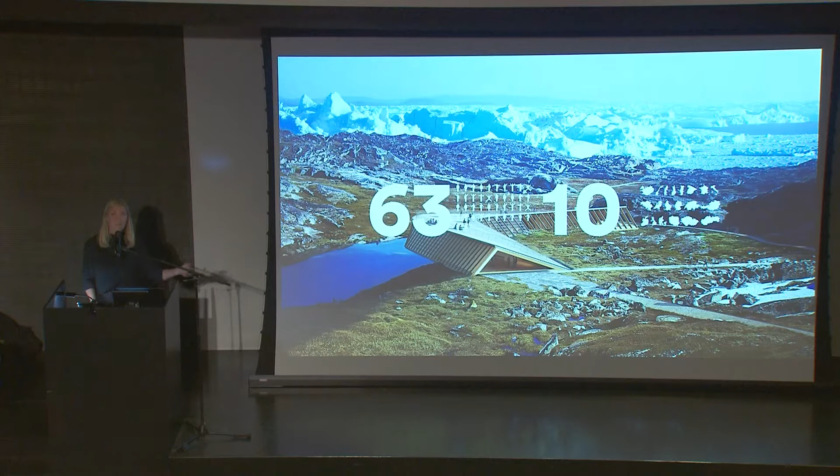We are 63 people in the office for the moment, and we're from 10 different countries, including the United States. We like to have a global atmosphere in the office, even though we think that we do stand on the shoulders of the Scandinavian tradition. What you see here is the Icefjord Center in Ilulissat in Greenland. It's already almost finished, but it takes a long time because it's placed 300 kilometers north of the Arctic Circle, and it's almost impossible to build here during the winter time. So we spent twice as much time to build here.

But sustainability with this project is also about how to ship material to this place, how to pack it into containers, how to assemble it without using too much machinery, and so forth. It's mainly a wood construction also, and it's prefabricated and shipped to Greenland, because there's no woods in Greenland. You can say, is it sustainable or not to ship wood from Denmark to Greenland? But there's a lot of choices that you have to make all through this process, and that's what you need to work your way through.

We think that sustainability also has to do with being in place and in a way also creating place where you are. So it has to do with reading the conditions around the place. It has to do with understanding your own role in comparison with time, you could say. This is the oldest landscape in the world, actually. This is where you discover that the Earth was, I don't know how many million years older. When you look at the rock here, it's bedrock, it's from the inside of the Earth. So being in place and understanding your own role is part of being sustainable, and also part of anchoring the building to the place and making it part of a local life.

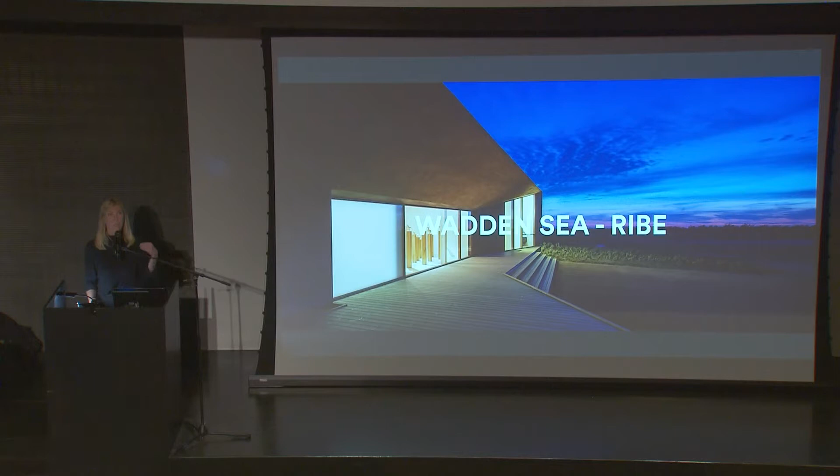The Wadden Sea Center in Ribe is in Denmark, and this is all about materiality and history and landscape at the place. We're using locally harvested straw as a material that clads the whole building, both facades and roof. And somehow it has very much to do with the landscape. It doesn't have to do so much with choosing a certain material, but it has to do with choosing the right material for the right place at the right time.

The third Wadden Sea Center that we're doing right now is in Groningen in Holland, and this has to do with the tide, and it has to do with understanding the horizon and the lives of the seals around, but also it has to do with the industrial harbor and, in a way, giving back public space and direct access to the water.

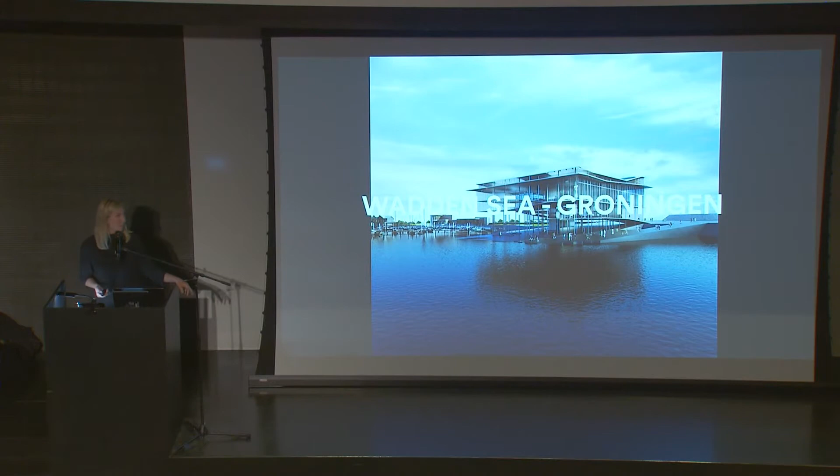The last competition that we've been winning and that we are doing the detailed drawings of right now is the Whale, which is 300 kilometers north of the Arctic Circle in Norway. And this has a totally different materiality because it's a totally different place. It's using local stones as a cladding on the shell of the roof. And it's a center for whales. Also, it has to do, of course, with a very specific place, and it has to do with the reading of the landscape.

So coming to Arkansas. The Anthony Timberlands Center. Arkansas is a whole new place for us. So we've been trying to understand it, and maybe we have a little bit of a romantic reading of the place. But to me, it's a very unique setting. You have, in a way, the feeling and the presence of wildlife and forest right around it. And for a Scandinavian, especially for a Dane, that actually never really meets the real wildlife, this is a very exotic place to us.

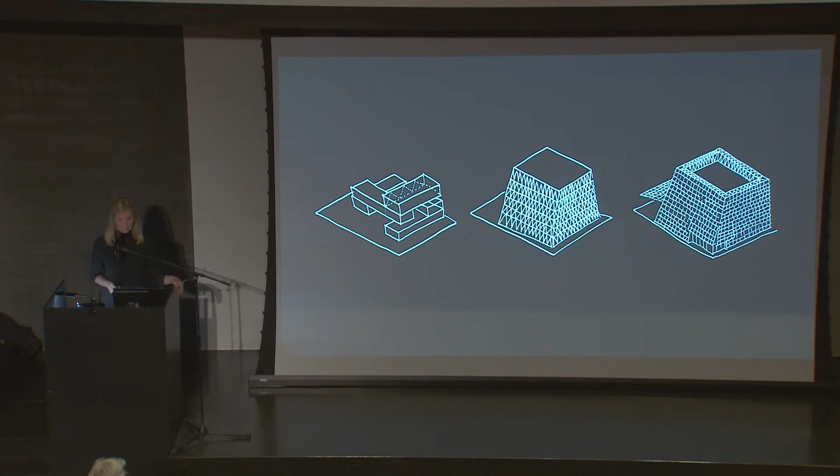At the center of the building, an open atrium extends from the fabrication floor to the roof terrace, like a clearing within a forest. So ascending the open atrium stair, visitors have uninterrupted views to the fabrication shop and to all the activities in the building. So you move up along the stair on the inside of the atrium all the way up. And by doing that, you will have both views to the activities on the floors, but also to the activities in the fabrication shop.

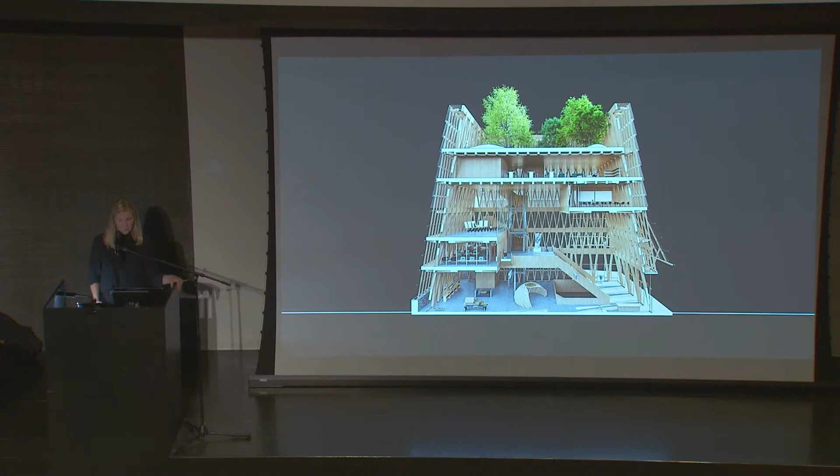It culminates in the rooftop forest that provides a 360-degree view overlooking Fayetteville and the Boston Mountains. The double height spaces create a spatial variation and provide the flexibility and potential for adding intermediate floors within the vessel, and hereby expanding the total area within the building volume. And this is, of course, to do with future expansion.

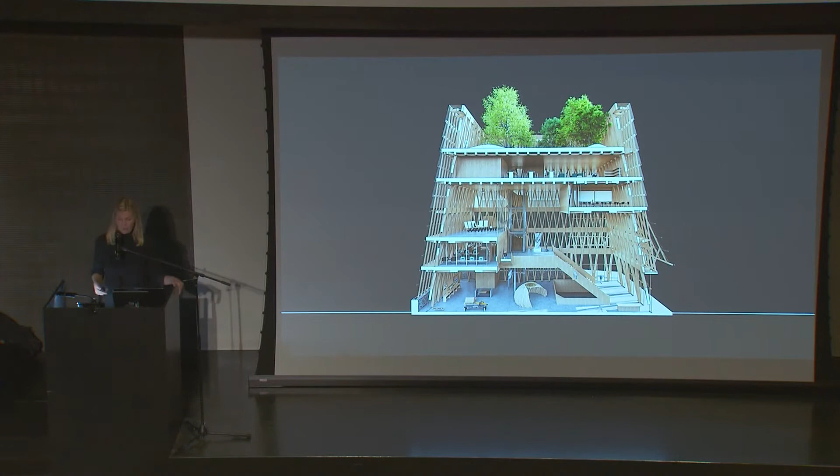So you have the possibility of adding extra floors into the double height spaces here, and by having no columns here, you will also have the possibility of really making very large objects or high objects in the fabrication shop.

The roof terrace here, we actually imagine as an arboretum where you can have Arkansas trees planted here, not only to show the Arkansas trees, but also to provide shadow and the possibility of actually being on the rooftop in the summertime instead of having the sun burn you out.

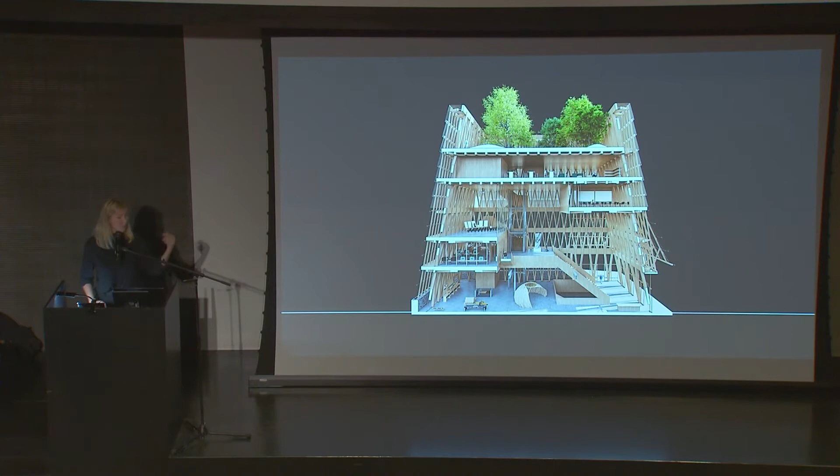The prominent porch motif that you see in the vernacular Arkansas architecture is reimagined as a balcony zone between the facade layers. The pine cone, in a way, is opening up when it's losing its seeds, and we imagine the outer skin of the building to work like a pine cone. So you have an outer layer of single layer glass, very simple, very low tech, almost like a cladding that can open up, or like wood shingles but in glass.

So by having this outer layer, you can in the summertime open it up to get air, but also you can slide the whole outer facade away, so you have a porch situation. And in the winter time, you can slide it back, and you will have an intermediate zone that is preheated by the sun. So the porch actually encircles the building and acts as a social space. So in the summertime, you could also just use it as a balcony space, not smoking, but drinking coffee.

And also we imagine that the whole facade can be used as a tree nursery for small trees. And by doing that, we can actually show off the whole life cycle of the tree. There's also a potential to integrate planters in the flooring, or we can work with a much more minimal balcony construction, and that's all depending on the final usage. The porch and the wood structure is protected from the weather by the shingle glass, but can also be completely opened in the warm season.

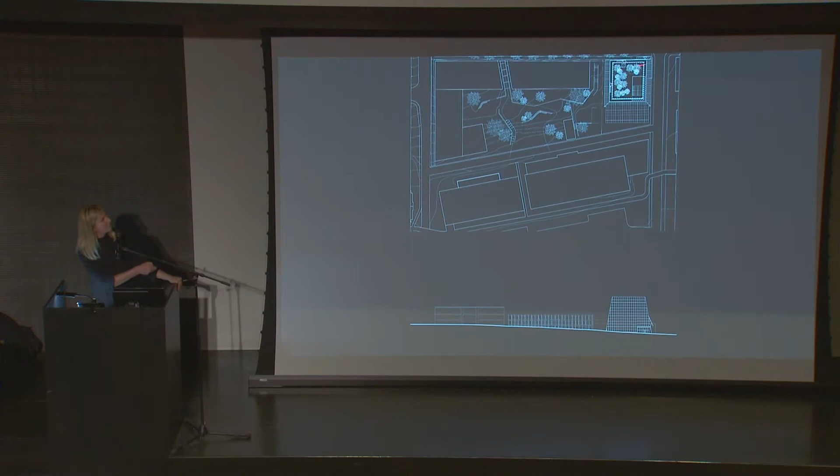The entrance is placed at the corner of Martin Luther King and Government Avenue here, and is directed towards both streets. And then you have the fabrication yard here with the delivery in this end, because we think it's quite important that you don't cut off the connection between the art school and the fabrication shop by lorries and trucks coming, and delivery and so forth. So the delivery is here, and the gantry crane is coming in this direction.

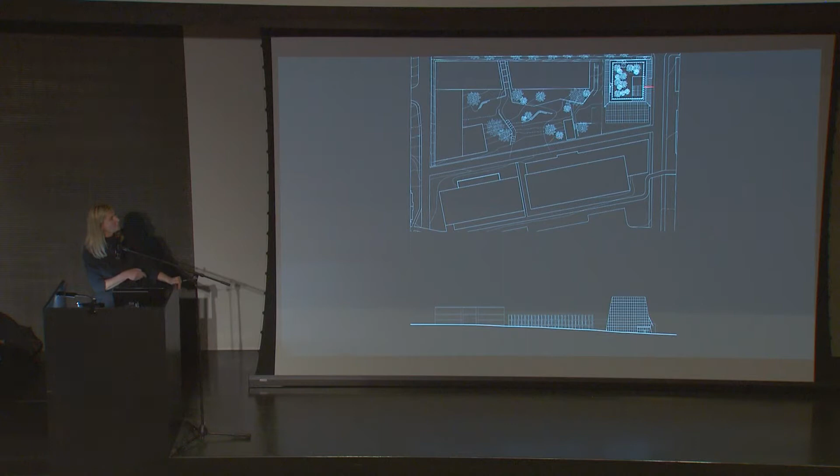The outer layer of glass is subtly folded out where we need more coverage. And here at the entrance, it's both marking the entrance, and it's also giving shelter and connection with the entrance, so you can actually be standing here, a group of people waiting, and not get wet. And it's raining here, like in Denmark.

Passers-by will catch a glimpse of the fabrication shop or the adjacent collection of the latest completed projects on exhibit. Further along Government Avenue, pedestrians can see directly into the main hall of the fabrication shop. The 20-foot tall gantry crane is at work in the center of the space. Robotic arms are working on construction elements for a few building prototypes.

So if we go through the plans, you enter either from Government Avenue here or Martin Luther King Jr. Boulevard. And so you can enter from both sides, and we imagine that the entrance space, together with the gathering stair here and the top floor here, is also an exhibition space, so that you use the space for many different uses, and the rest of the floor is actually the fabrication shop, with the possibility of having smaller spaces underneath the first floor, and building larger things in the middle here. So the floor height is at least 6 meters and higher.

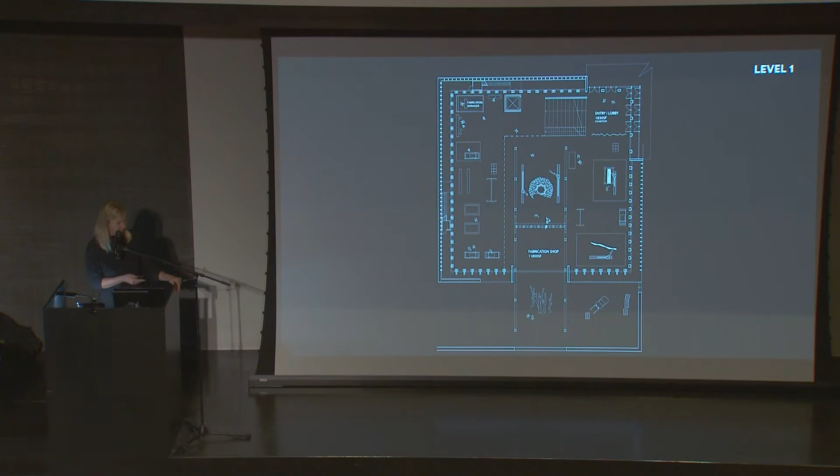The fabrication shop is directly adjacent to the entrance, and is column-free space with varying ceiling heights to allow for maximum flexibility. Since fabrication and machine design requirements are continuously changing, we suggest that we make custom enclosures to meet special space requirements, and that we actually work with the house-in-house method, which is building interior volumes within the larger space. And this allows for smooth, efficient transition of equipment. So this is also a subject that could be done in collaboration with the University of Arkansas, and it could be a very obvious student assignment, and could be part of the whole process.

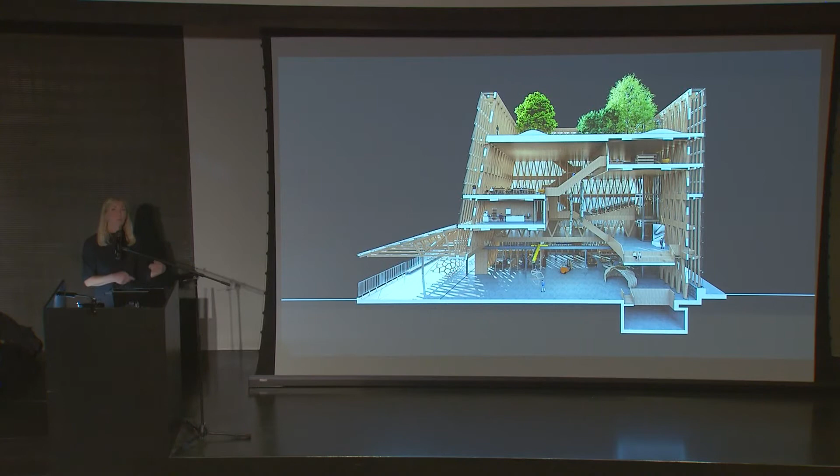The gantry crane rail is supported by an independent construction, and that is to ensure that you can change it, that it is not part of the building's construction, that it's independent, and you can change it, you can get another one, you can get a bigger one, whatever. So the house is not dependent on the crane. And it extends into the fabrication yard to ensure flexibility.

In the fabrication yard, students can construct full-scale mock-ups in the open air, and large deliveries are made with ease via the loading dock. So you have a loading dock here. And the yard is in direct connection to the adjacent shared landscape and allows for effortless social connection and convenient communication for interdisciplinary projects with the art school. So, of course, we know this is not going to look like this. We just imagined a facade, but there's a big opportunity here to work together with the fabrication yard, to also open it up towards the art school and to use this space out here as a common space.

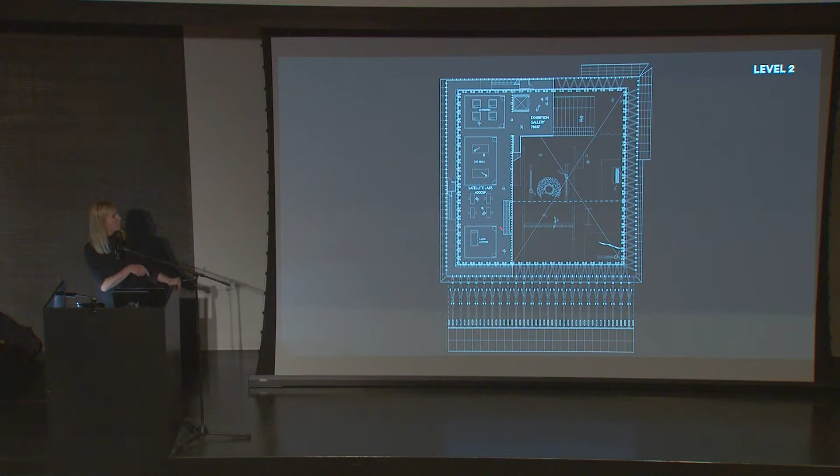On the second level, the exhibition space provides elevated views toward the action of the Fabrication Shop. Here, curated shows present the center's latest ideas and research to students and to the public. Satellite labs are also located on the second level with direct internal access to the main Fabrication Shop. The satellite labs are ideally located for constant visual communication with the main shop. So the direct access is here. So you can move up here and you can actually also come down directly to the shop here.

As the floor rotates and you move upward, students and visitors gain constantly changing perspectives on the Fabrication Shop and the landscape beyond. The rotating floors introduce various spaces for collaboration and sharing knowledge. And what you see here is actually just to show that you can use the center of the space for large objects.

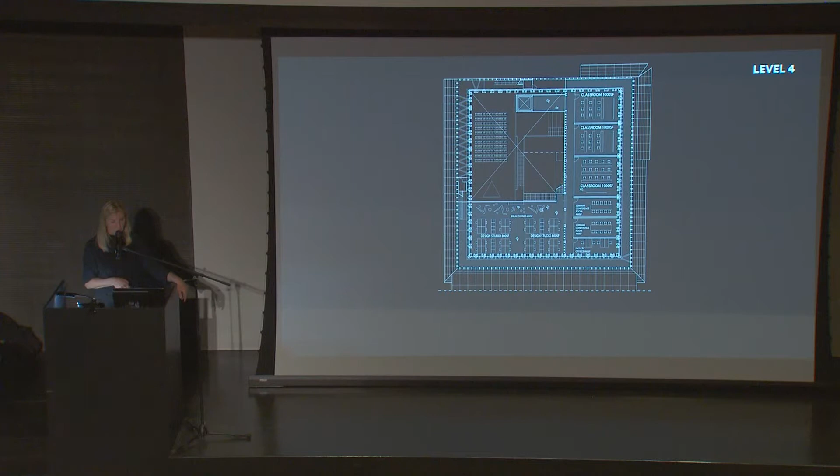The design studios are located in the open atrium on the balcony on the fourth floor and are adjacent to the classrooms and the seminar rooms. The seminar rooms are flexible and can be operating as two smaller rooms or opening into one larger space. So you have the open design lab here, and you have more closed classrooms and seminar rooms here.

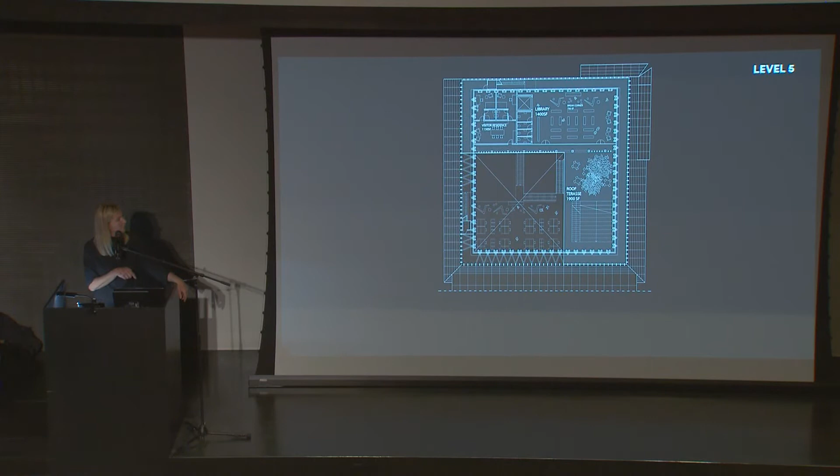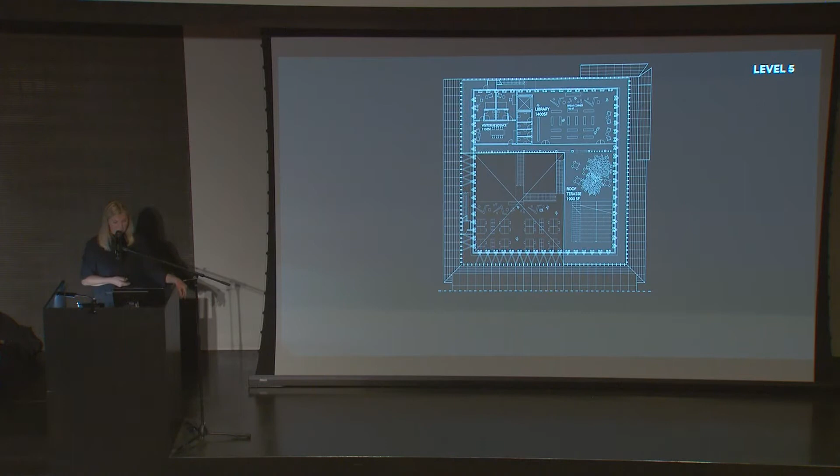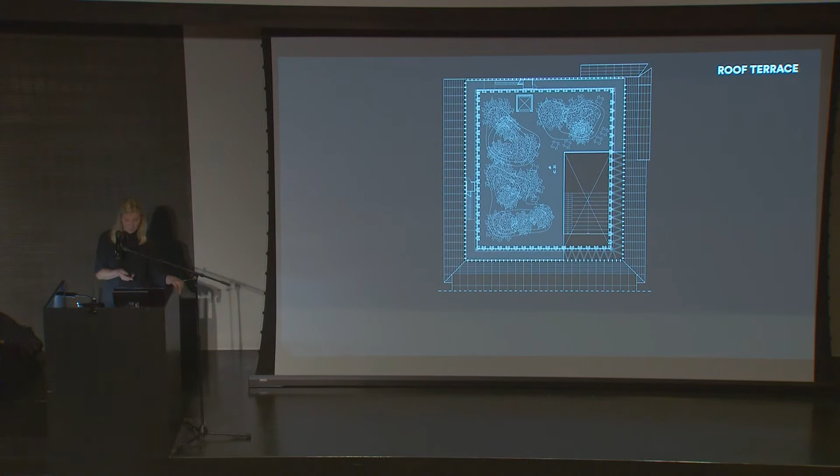On the fifth floor is a small library and the residence rooms in connection with the lower roof terrace that again has the auditorium stair leading to the top roof terrace. So this is a more informal gathering space. It could be used for events, of course, but also for education. And the top roof terrace with bigger trees on top here, and the views, of course, all the way around Fayetteville and Boston Mountains. The roof terrace is planted with trees to create shelter from the summer sun, as well as act as part of the rainwater collection system.

A little shorter, so I'll move this down.

And in these floors, the intention is that we would have a panelized timber system that is stiffened and strengthened by these diamond glulam beams that are bent and create an expressive soffit, so that you can really view the beauty of the timber.

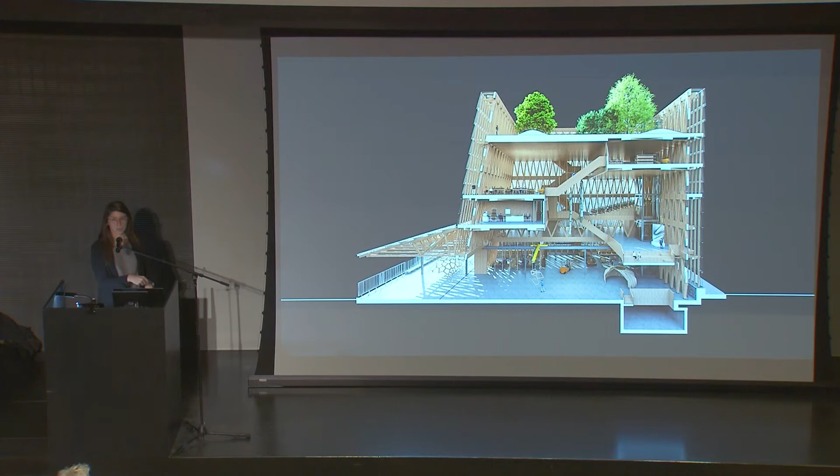One thing to note about this is that it's not reliant on necessarily being cross-laminated timber, and we could also use other sorts of panelized timber systems like glulam on edge, dowel laminated timber, nail laminated timber, to construct these floors with the assist of these stiffening beams. And really all of the timber in the project can be made with simple glulam elements.

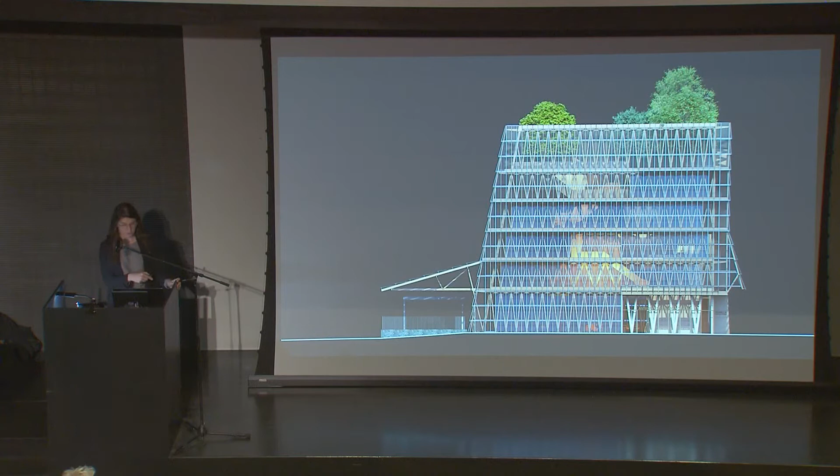The glulam beams do then cantilever out to support this thin timber facade. And so here's a location where you can potentially even use sawn lumber or other simple locally sourced Arkansas timber. And you can see it maybe a little bit more clearly here, where we have our beams cantilevering out to what would be this facade support.

And there's a lot of articulation in this project. We're looking at a lot of individual elements, which is intentional so that we can use timber that can be locally sourced in Arkansas. But we also then need to think about how we can construct this in an efficient way. So if we zoom in diagrammatically at one typical connection type, just to orient everyone to where we are, this would be one of the diagrid elements.

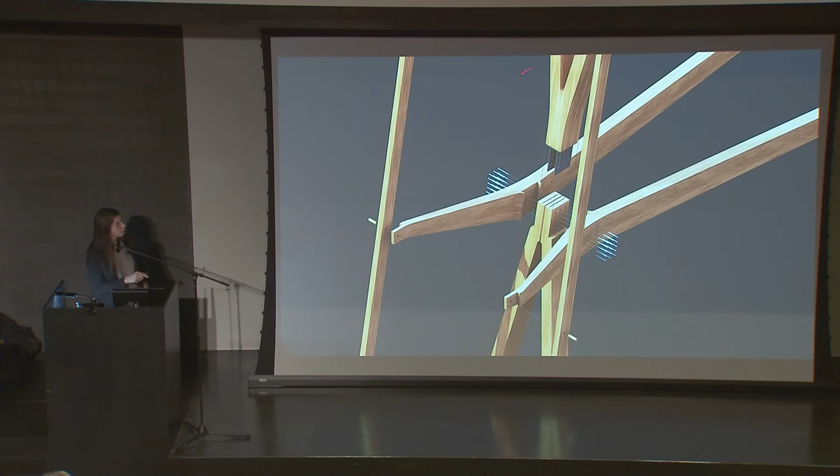This is a joint where a diagrid element would be joining with a diagrid element below. This is one of the stiffening beams coming out, cantilevering out as a continuous element to then support what would be our sawn lumber backup facade support. And a couple things to unpack on this particular item.

So one is that we're looking to, as a first step, offset all of our timber elements so that we can have simplified connection details. Instead of creating a very complex 3D node where all of the elements are coming in and trying to meet in one place, we're allowing the timber to kind of fly past. So these beams are flying past the glulam support. It also means that we can have a continuous element that's cantilevering, so we're avoiding any sort of complex moment connections that are much more difficult to do in timber.

And then if we look at each individual element, the diamond beams are part of the expression of the interior. And there is some curvature to these elements, but the idea is that this is a singly curved beam that can then be turned on edge to stiffen the floor and really give a kind of beautiful expression.

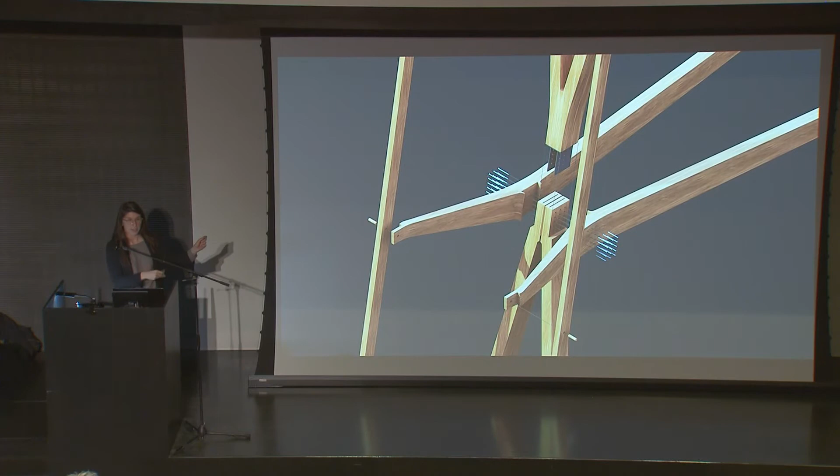It's maybe harder to read in this particular image, but for the whole floor it would be a 45-foot package, and this whole curved element can be prefabricated in a factory, brought onto site already in its full length, and then you really are limiting your connections just to where it comes at each node point. It would be a similar strategy with the diagrid, where some of the complex zones where it comes together would be done in a factory setting, and then you use a more simplified connection in the field.

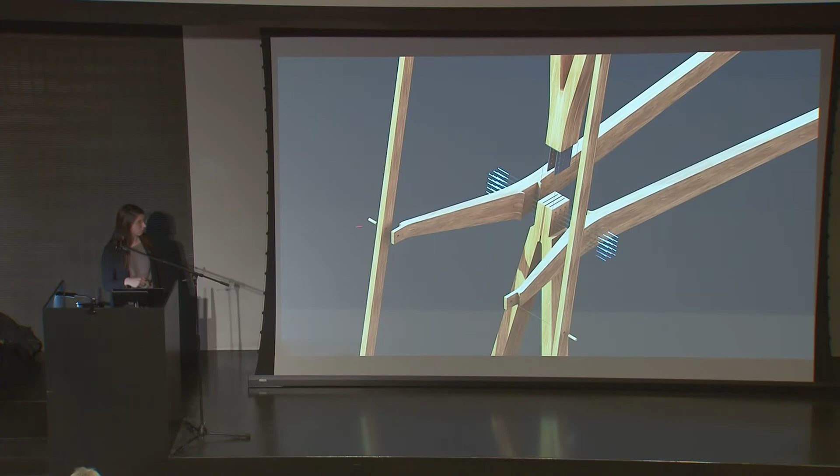And then one of the areas that we think would be a really interesting collaboration with the students and faculty here at the university is at the facade. So you can see here we've rendered just a very simple connection, but this is an area where we could really think about how we can engage with the community in developing a custom wood joinery connection there.

So it's at a scale where we can really prototype full scale with students here. We can partner with you to test out different ways to look at the history of wood joinery, but then where can we take that with the CNC technology that we have now?

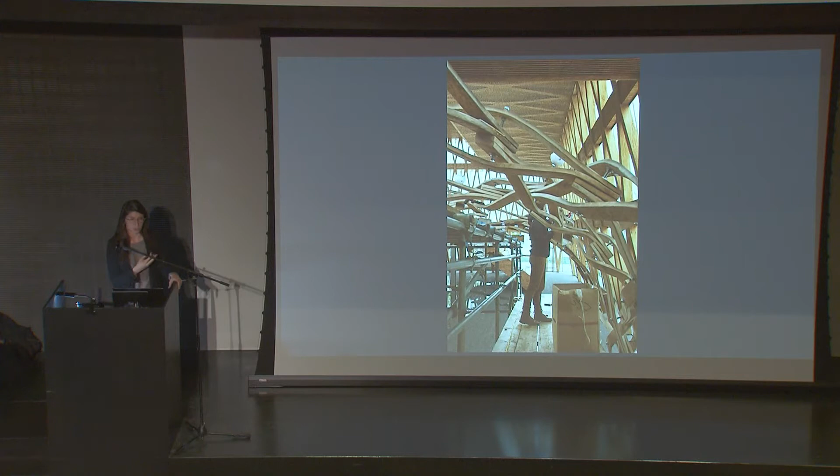The same type of machines that we're going to have in this facility are the types of machines that we can use to actually mill some of these complex joints. So it's something that we would really like to look at collaboratively and have this kind of unique expression for this building that gets implemented.

And thinking through to the construction, it would also be possible for that particular scale of item to bring a CNC machine to site to fabricate some of the elements, which could be visible to the community and to the university during construction, so you can really see what's happening.

So we've zoomed in, and now let's maybe zoom back out and think a little bit more about the sustainability of this project. So, it's understood that this is a mass timber building, and, sorry, I'm getting some feedback. I think we all understand that this is a very sustainable material that we really want to showcase in this building. And we have the benefit by using mass timber and really expressing it to show how we're sequestering carbon

through the use of timber, but also utilizing local Arkansas timber means that we're minimizing some of our shipping and the carbon that's associated with transportation. So we're trying to keep this as local as possible, again with the decisions to use glulam and sawn lumber.

So one of the elements that we've talked a bit about is the covered porch area that surrounds the building. And this is something that we think is also important for our sustainability strategy. So we have a rain screen on the outside and our thermal barrier on the inside. And that provides us with this buffer zone, which won't be fully conditioned, and we'll use passive strategies to try to maintain a temperature there that can be comfortable for most of the year, certainly through the shoulder seasons, and then can also act as a buffer for the interior space where we're going to have a tighter set point for comfort and for the use of the space.

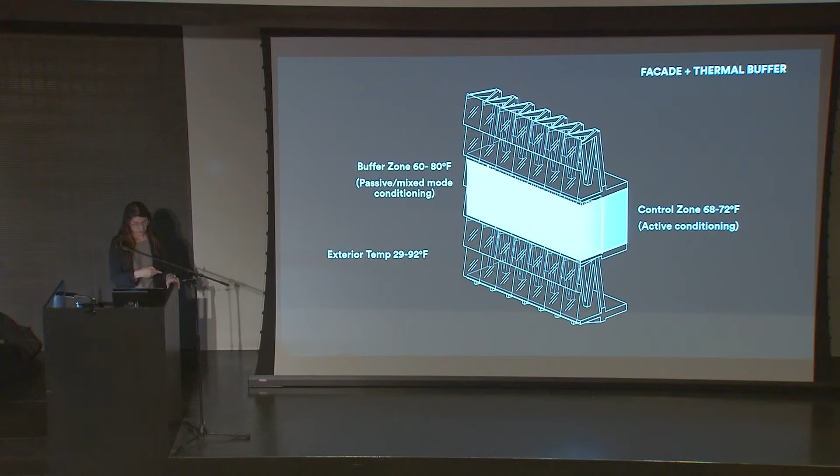And then on the east, west, and south facades, there are a few ways that we could consider incorporating more shading into this space. So one could be with the facade materiality itself, but another solution would be using the nursery and the type of greenery that we choose to plant in different zones to create shading that can help reduce the glare in the morning and afternoon hours that can be difficult to deal with.

And while we're looking at the nursery, I think we can also talk a bit about some rooftop rainwater harvesting. So, as is evidenced by today, there is a pretty consistent amount of precipitation in this region, which makes this project a good candidate for rainwater capture. And so if we use rooftop collection and then a gravity-fed system to the greenery to do the irrigation for our project, that both reduces the potable water demand on the project, but then also means that we aren't using energy to pump water up to irrigate these. So there's kind of a double benefit to that type of strategy.

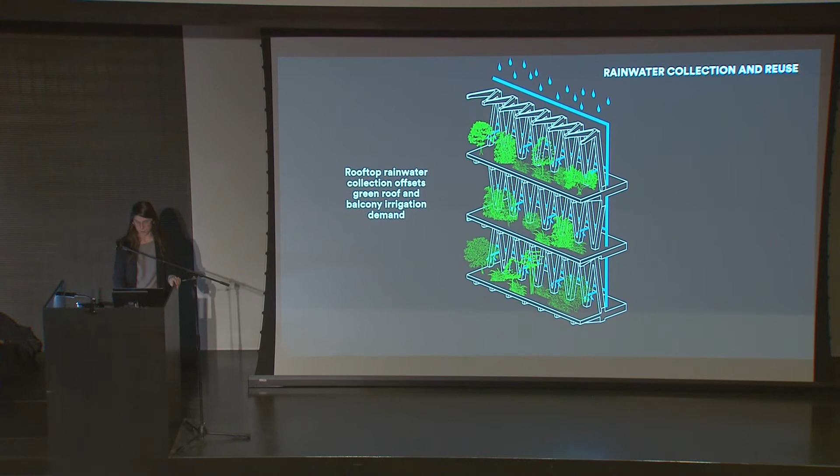When we're looking at particularly the south, east, and west facades, there are some strategies that we could take to passively temper the space in the summer. So the first strategy is, of course, to try to block solar heat gain. So that can be done with the greenery that we were discussing, but also with deployable shades. This is another place where we think we could really collaborate with the university on coming up with some custom screening that could be deployed during the summertime, but also on the east and west facades to control glare.

So we've taken this first step at reducing the solar gain, but then the next is through natural ventilation. So there's obviously the condition that we've talked about where it is just open on very comfortable days that we may want to employ. But even when you're not totally opening, you may still want wind or other sorts of protection. You can open at a low point and at a high point to create a single-sided natural ventilation strategy.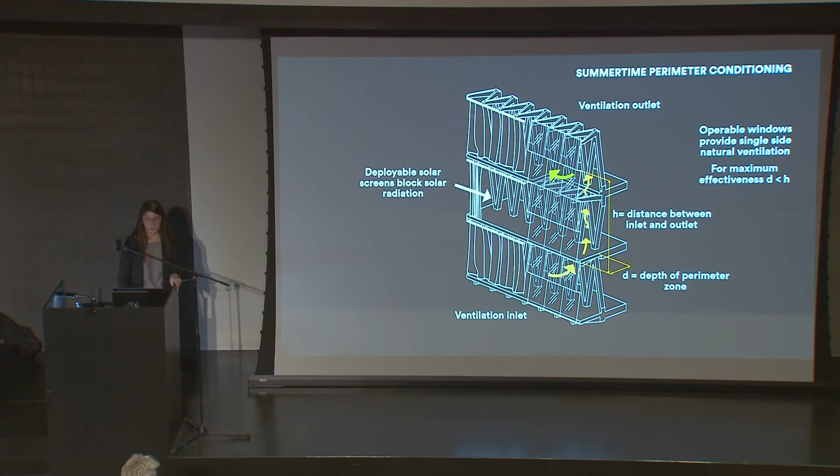And then, given that we have all 4 seasons here, we also need to think about what we might do to handle this space in the winter. So that we can kind of extend the use of these balconies as a way for people to engage with the space and also to maintain plant life, we would want to give some sort of heating to the space. But we have the benefit of the waste heat that we're getting from the building's air side system. So we can use the rejected heat to create a radiant floor system here.

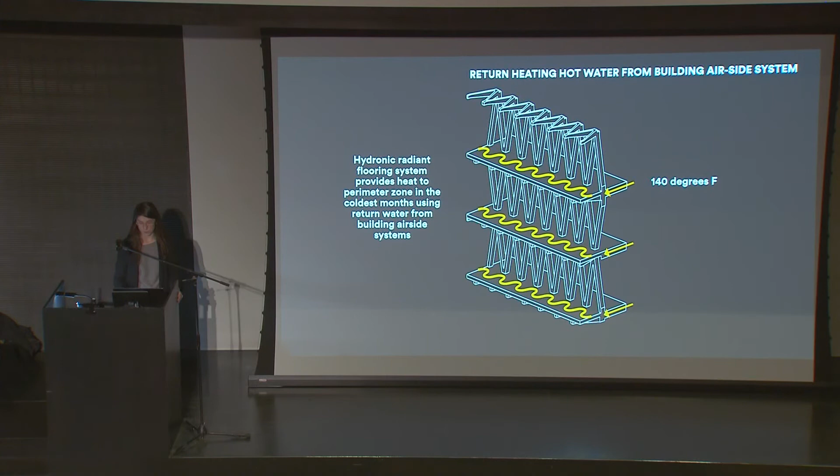When you look at the program of the building, given the high shop and lab space demand, there's going to be a lot of demand for circulated air. So we think that one of the highest energy demands is actually going to be driven by conditioning of outdoor air. So we propose in the first instance to decouple the outdoor air conditioning with a dedicated outdoor air unit from the local conditioning, which can be done by zonal fan coil units, active chilled beams, and those types of solutions.

But also, we can use some low-tech solutions that allow us to precondition some of the air before it reaches our mechanical equipment. So a Trombe wall is a pretty low-tech system, which is essentially just an enclosed kind of facade shaft where you allow your cold air to enter from the bottom. You use solar radiation to heat that air. By the time it gets into your equipment, it is already at a higher temperature. So you're not using as much energy to heat to the set point that you're looking for in the building.

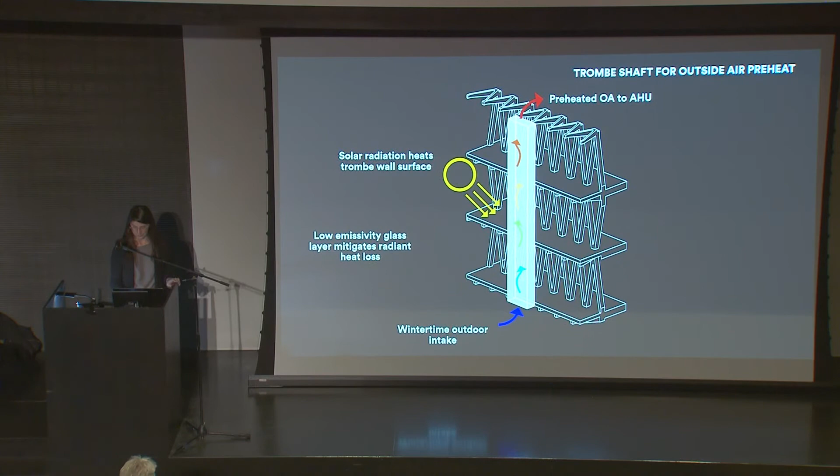And then, one last idea on the sustainability front is to actually try to use the building to generate energy on site. And one way to do this would be with building integrated PVs. And there are products that can be transparent. And we have the benefit of our south facade having two separate orientations.

So we have a more vertical orientation, which is better for generating energy in winter, and then a more horizontal orientation that is better for generating energy in the summer. And that ends up balancing so that you have a constant level of energy generation throughout the year. And so, this is a system where we may be able to generate, not completely offset the building, but a substantial portion.

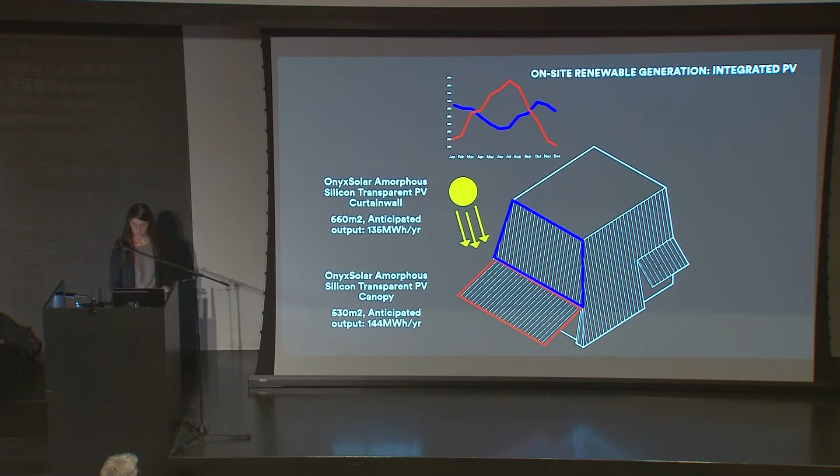And I think that concludes. I'll let Dorte finish. Thank you.

And then I would like to finish by saying that this is, of course, a conceptual idea. The idea of the double layer facade. You have, of course, the inner climate screen with the 3-layer glass, and you have an outer climate screen, which is much more like a very simple, non-technological, not airtight facade. So it's more to think of as a cladding, you could say, or a rain screen for the construction, than as a real facade.

But the idea is that you have this vessel, and that it has different possibilities. You can close off some parts of the inner facade. You could also maybe work with the outer facade with different materiality. And that, in a way, has this kind of simplicity also in the interior with no columns, so you have a lot of flexibility to actually work with this much more as a collage idea.

So it's not set design, but it's a conceptual design that is quite simple, but also strong enough to, in a way, withstand different ways of working with the interior and with both layers of facade. So yeah, thanks.